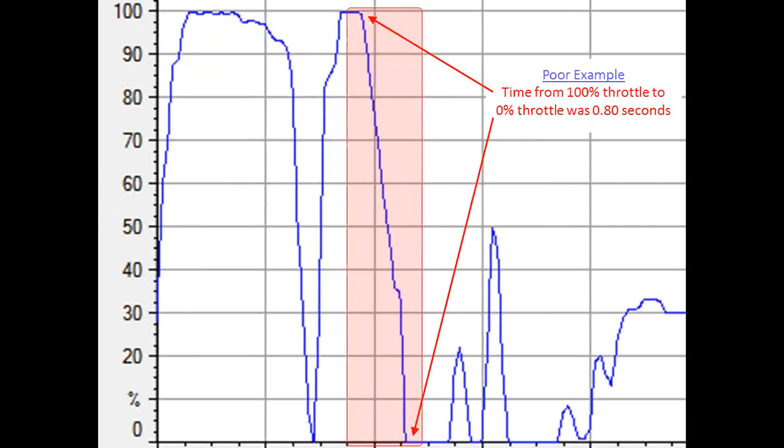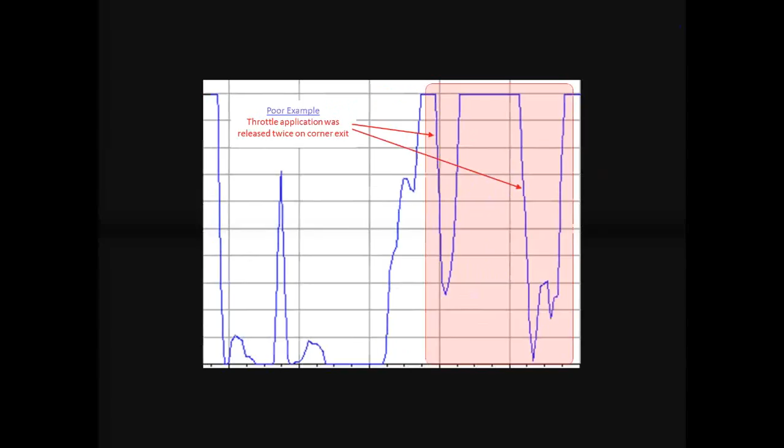It's just a little slow to react, like this driver is going to be. It is, right? And while you're pulling it up, Randy, I know you've got a couple questions that have recently popped up, if you can maybe handle those. Oh, sorry, that's okay. I'm not seeing them, David, at the moment. I'll have to fix this.

So here is a bit of the bigger picture zoomed in that Randy was talking about, and we can see that the driver is coming along and trying to get back after the throttle, but it's a steady climb. This is an MX-5 Cup car, so it has a little bit of power, but not a ton, so you can get away with a little bit more of a steep curve here, and then a little bit of throttle off on the way out in this particular case. So there was a problem on the exit where the driver got after the throttle, and then partway up on the exit, probably ran out of track. Maybe an understeer or an oversteer. We could look at some other channels to understand why better, but we do know right off the bat that the driver went to full throttle and then had to get out of the throttle.

And those are those big, pointy things sending down. So we had to go from 100% down to 30% to get the car to do what it wanted to do, then back to the floor, and then came up here, and then this area had to get back out of the throttle again. So throttle on exit, we'd like to be able to get after the throttle and get it up to full throttle and not have to have those releases in the middle of the corner.

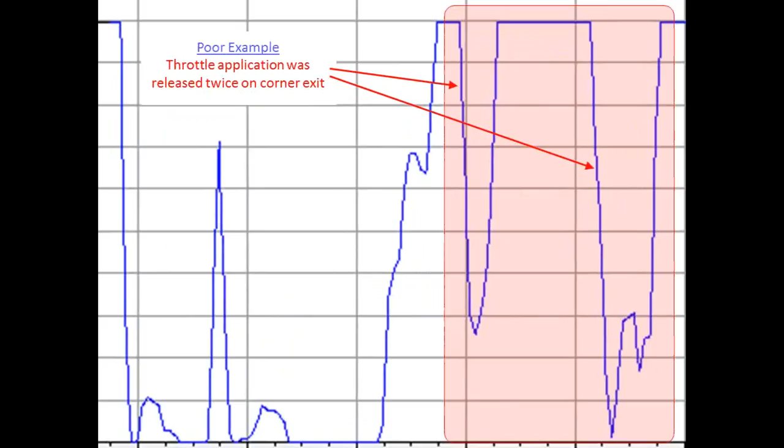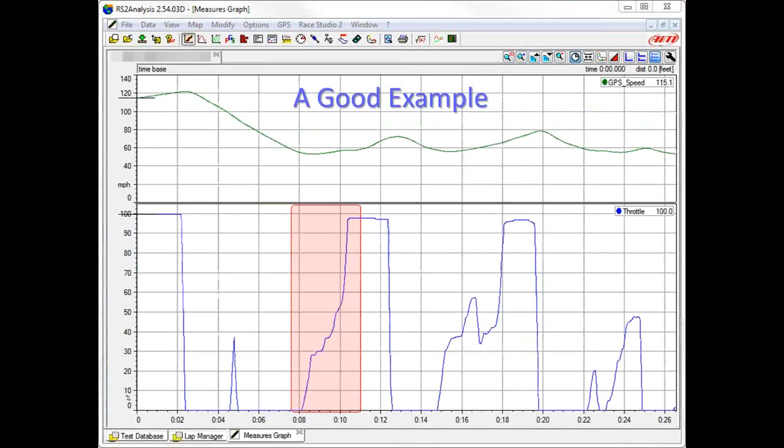Let's look at what maybe a better example would be. We're zoomed out a little bit here. We're going to jump in a little deeper and take a look at this one. You can see that the throttle has started to build from the lower end, down at the bottom side, and then squeezed up, and the driver is taking what the car will give.

And like Randy said, as you're feeding your hands back to center, your foot is almost like on that same string, and you're actually feeding more throttle as you release the steering. You can see the driver went after some, hesitated a little bit when they maybe felt the car doing some things, and then was able to squeeze on up to full throttle for the next straightaway.

Steady application. One of the things this tells me about this driver, that hesitation bit there, is he's got his eyes in the right place. He's looking well ahead, and that gives you the information, and you start adding that throttle and the tires. You're trying to keep it right on the edge, right on the limit.

And so you go a little over the limit, and you feel the car, and you see the car moving a little bit wide. You got to have your eyes in the right place to be able to identify that. If you're looking ahead, add that throttle, feel the car lose a little bit of grip. It's okay, that's all we can take right here. It hooks up a little more, and you continue adding some more.

You see, this driver was a little more careful after this mid-acceleration correction, too, but he never backed off. It was more and more and more, all the way to full. A good trace, and it shows a driver that's looking ahead and really looking for the limit.

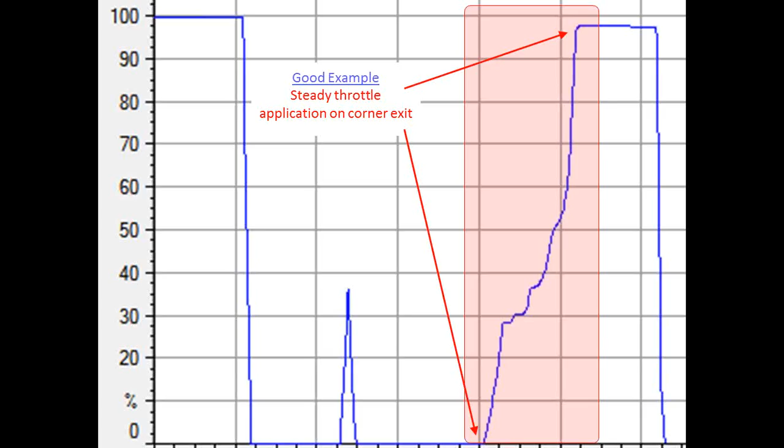And you crash less. Yeah, and that's a good thing.

Let's talk about shifting speed by looking at the throttle position. Let's take a look at what that trace looks like.

And I'm seeing some of the questions. I haven't had a chance to, I'm not the world's fastest typer, but there is some information we are going to talk about on solos and GPS-based systems where you don't have throttle position. So some of you that are asking that question, we will get to some other look and feel of some other things. Plus, my final thing that we're going to talk about today is some math channels.

And I'm going to make that available to anybody that writes me an email and asks for it. I have some math channels that are based strictly around what in our AIM world, the Solo device, which is a GPS-based data logger, that we can do some coasting and braking and throttle on and some things without that actual sensor. It's not as good, obviously, but it's pretty darn successful. So we'll take a look at those a little bit later.

Shifting. When you're shifting, you can actually take a look at that throttle position sensor, and we can take a look at a couple of, again, a bad example, then a good example of what a slow shift versus a high speed, a faster shift, and see what it looks like in the data.

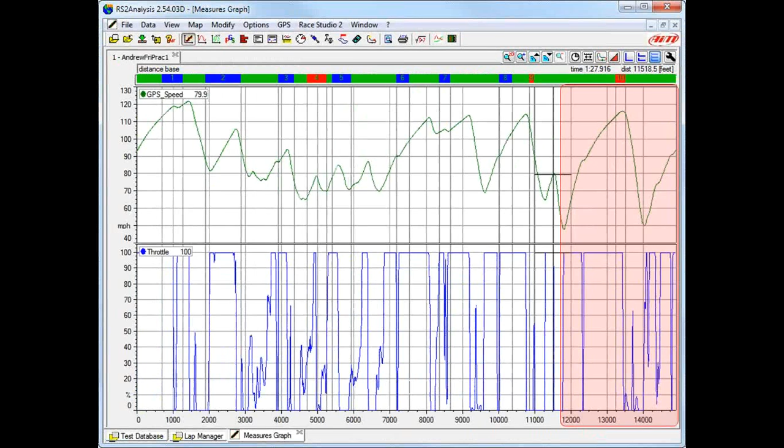So let's zoom in a little bit on this one right here. You can see here that the throttle position in the lower half, the driver's coming along, and we can actually just use a measure tool, and we can click on from when it goes from 100% throttle down to 0 and back up to 100%, and you can make the assumption, even without a gear position sensor, that's how long it took to shift.

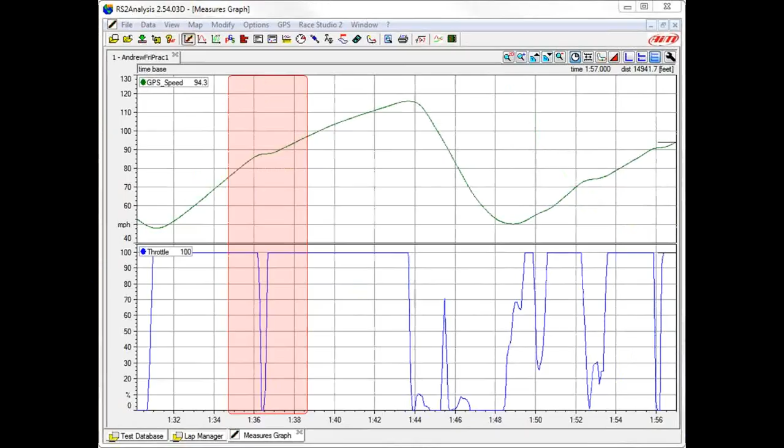So I'm going to zoom in just a little bit more. And let's take a look at this guy where these arrows are pointing. So right across here, the throttle position's coming along, it dips down and comes back up. And this particular shift here was 0.55 seconds, a little over half a second.

And when you start to see that, and then you take your eyes up and you look at the result of the speed trace up above, you can see where the speed trace was climbing nicely, and then with that fairly slow shift, it basically goes horizontal for a while and then starts back up again. You lose that, and you not only lose that for that moment of the shift, but of course you're that 2 miles or 3 miles an hour slower than the guy that had a better shift all the way down the rest of the straightaway.

What do you think about that, Randy? Well, fast shifting, it can be huge. It can be a free time thing, as long as your transmission can take it. You are limited, and you have to listen to your transmission, right?

If you have to force it, you're going to hurt the car long term. So it has to be as quick as you can do it without hurting anything. And every car has a different limit on that, and they're getting better and better all the time. It's getting to the point where we don't have to do this anymore.

It's automatic in the paddle shift cars. Your engineer might adjust the shift time or the throttle drop time for you. That's another way to mechanically, or from an engineering standpoint, change your shift speeds.

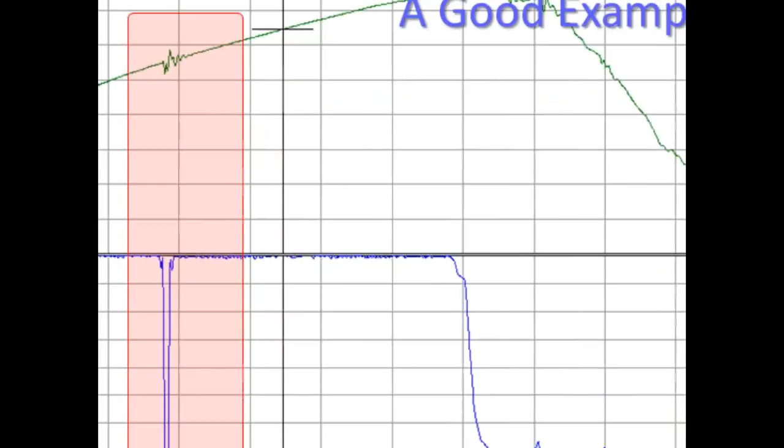So let's look a little bit deeper here. This is a Spec Miata, and if we zoom in just a bit more, we can see here... oops, wrong way, wrong buttons, let me jump one more ahead. So this is the throttle position trace down here at the bottom, and this upshift was 0.18 seconds. On the speed trace up here above, this is on the rear drive line. This is during the 2006 runoffs, and you can see the little wiggle in the speed sensor data was when the drive line just shook from the shift. So we can pick up the shift points from the speed trace as well as the throttle position.

My son quickly told me, in 2005 -- quick little story here -- I was always preaching to take it easy on the transmission, don't beat on it too hard, there's no reason for it. And he would go out and run, come back in and say, no, if I shift a little bit harder, I'm pulling on these guys if I abuse it just a touch. So we started looking at data and looking at these shifts. I'd tell him to run 3 or 4 laps of normal shifting, then some speed shifting stuff, as long as he wasn't missing shifts.

The data quickly showed that in a low horsepower car like a Spec Miata, that quicker shift really did help. Spec Miatas have gone up in price a little bit, but back then I was paying, I think, $850 or so for a transmission, and I had to replace it halfway through the year. So a tenth or so of lap time, over the course of a lap, ended up being 3 or 4 tenths of speed for $800 halfway through the year. That is cheap speed. So it was like, beat on that transmission all you want, man, if it's going to make it go that well -- as long as you're not missing shifts. That was the key to me.

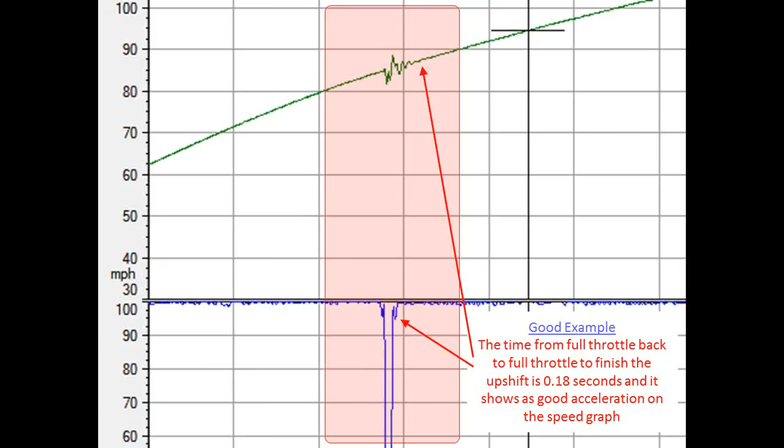So it's a Spec Miata, and it's at 85 miles an hour. I would suggest that it's probably not wheel spin. Right? So let's jump down one more. Let's see what the next topic is.

Brakes, and this is an area I'll start off real quick. I give these seminars from January through May, virtually every weekend somewhere across the country, to data users, and the one area that is the least watched in data, and the biggest area of gain for amateur racers and track day guys, is the brakes. The application of the brake and the release of the brake are two areas that always grab a lot of information from data sessions. So what's your idea on the brakes?

And then we'll jump into looking at some brake pressure release. One of the most critical steps between being just a regular driver at the races and becoming one of the fast guys is, at the end of the brake zone, being able to come off the brake slowly even though you're carrying speed, and at the same time carry more speed into the corner. It's really difficult for drivers to make that breakthrough to the next level, because they feel like they want to enter the corner faster. Well, if you're going too fast, what do you want to do? Brake more.

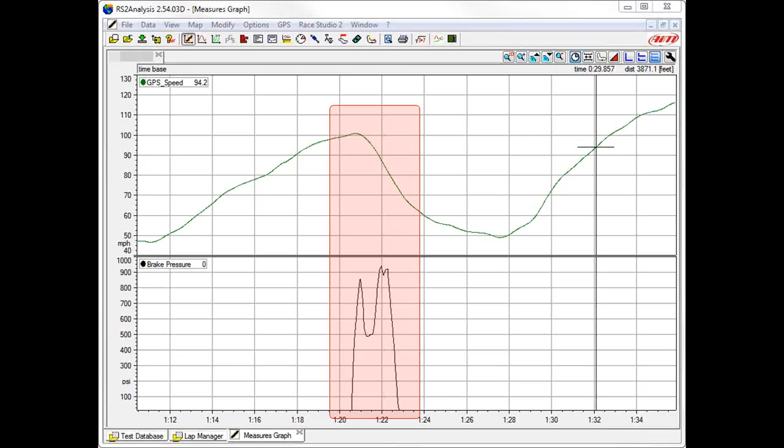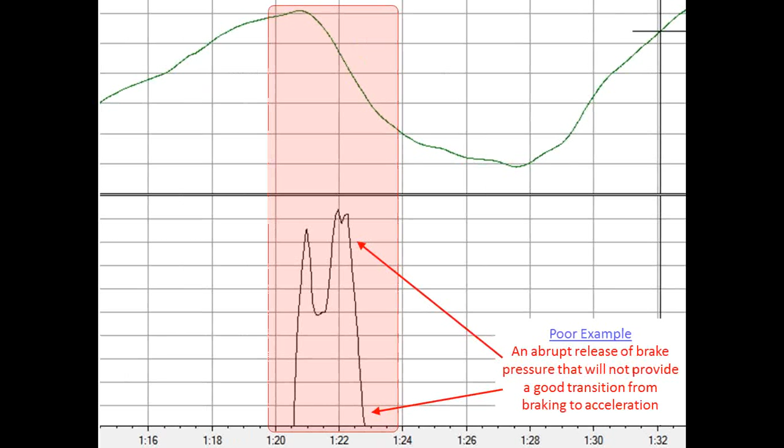Absolutely. So let's take a look at what maybe, zoomed in a little bit more, that abrupt release of the brake pressure will not provide a good transition from braking to acceleration. It's just not possible. The driver has a lot to do with how good that car is handling. Engineers can only work so hard and adjust so many things if the driver is really irritating the car.

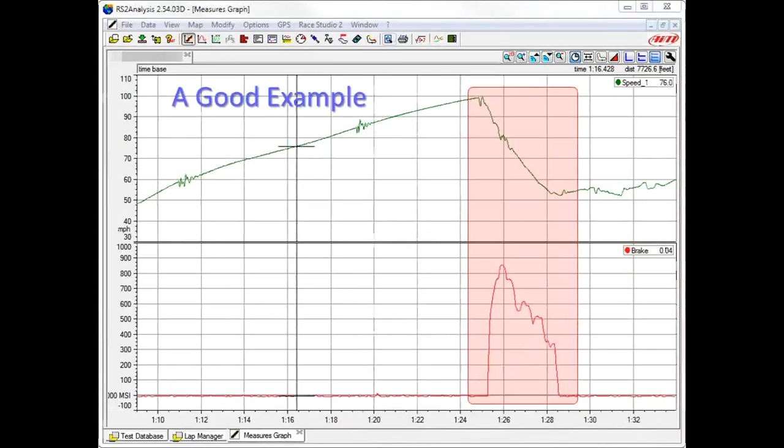So let's look at what maybe a little bit better example might look like. This is back to, I think, Spec Miata. Let's zoom in a little bit here. Yes, there is some drop off here, and the braking is moving around. This is that 2006 runoff, so it was a half wet, half dry track. There are times when the driver is doing some different things with his foot, trying to make some things happen.

But you can see here, basically the peak of the brake was at the middle of the braking, and then he starts to release, and when he's actually ready to go to the throttle, he's got the car rotated and the trail braking is happening, which you can kind of see from the shape of the speed trace coming down, even without lateral G's. And then when the time came, he drops the brake and then squeezes onto the throttle. So this is a little bit better example than the other one, where it was just an absolute straight drop off.

Now, Roger, is this a wheel speed sensor? The upper one is a rear wheel speed sensor in this case, and it's a brake pressure sensor on the bottom half. Good point, I should be naming those every time, and I haven't done that. Yeah, it's a rear. Most times we see lockup in the front, especially on a Spec Miata, but most non-ABS cars will tend to lock the front because it's much more drivable.

And you could look for those little dips in the speed trace. If it doesn't go to zero or close to zero, you're probably not hurting the tire. But that best grip comes with very little slide, just like in a corner, and it doesn't heat the tire up as fast, et cetera, also.

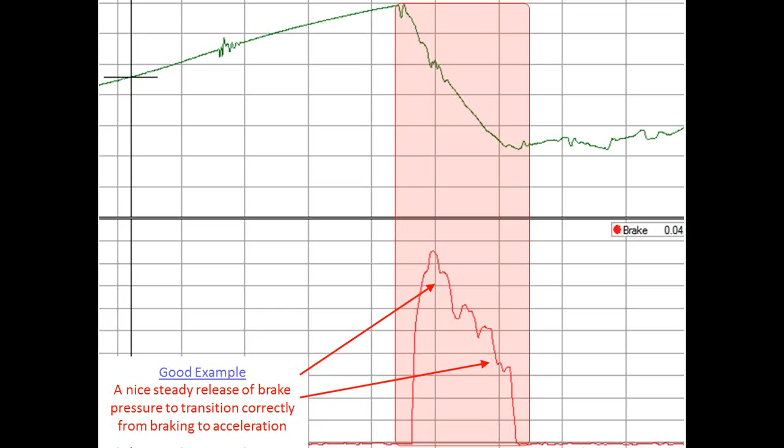Probably, you also might see a little bit of this from a downforce car. When the speeds come down, the brake pressure has to come down because you don't have that downforce anymore, adding grip. Absolutely, they're tricky to stop. Yeah, they're tricky, I'll bet.

The next one is one that you mentioned at the Road Atlanta webinar, and it's something that I try to look for as well, and it's consistency of braking during the downshifts. Yeah, that's a classic. It's an area that a lot of people can improve on, almost everybody.

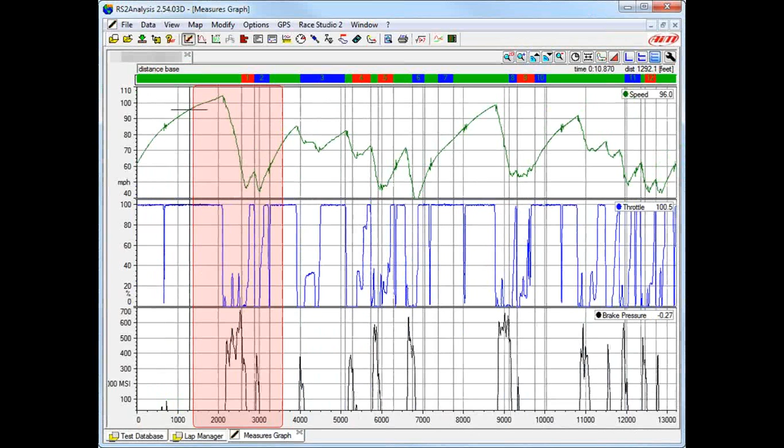So let's take a look at maybe what a bad example of that might look like. So here, the first thing we're going to look at is, let's zoom in just a touch more and take a look. In this case, I left the speed in the upper half, the throttle position, and the brake pressure at the bottom. So you can take a look at this guy here, the brake pressure here at the bottom.

You can see he jumped out of the throttle, it came down, and he rolls onto the brakes. Every time you see the blip of the throttle, you can see the movement of the brake pressure. That's a skill that it's very rare somebody has right off the bat, but it's something you can work on to make very good. You can see the inaccuracy of the driver's foot on the brakes, and this is again upsetting the apple cart. It's a rocking horse, loading the front end and releasing, loading and releasing, and it's just going to hurt the tires and hurt speed. There's nothing good about this.

We've got that little throttle blip there too, right at the beginning. I wonder if maybe this driver bumped the throttle when first going to the brake. Yeah, could well have been. Very odd. Sometimes you'll see the brake pressure touched back here, where a driver is just getting a little confidence bump, knocking the pads back or whatever. But in this particular case, I think he touched the throttle with his foot as he was going down to the brake, and again, not a good thing to do. Cars really don't like when you try to do both, because you're pushing the rear tires against the fronts, and you're already overloading the fronts. If you touch both pedals, it really irritates the car, and understeer happens almost immediately.

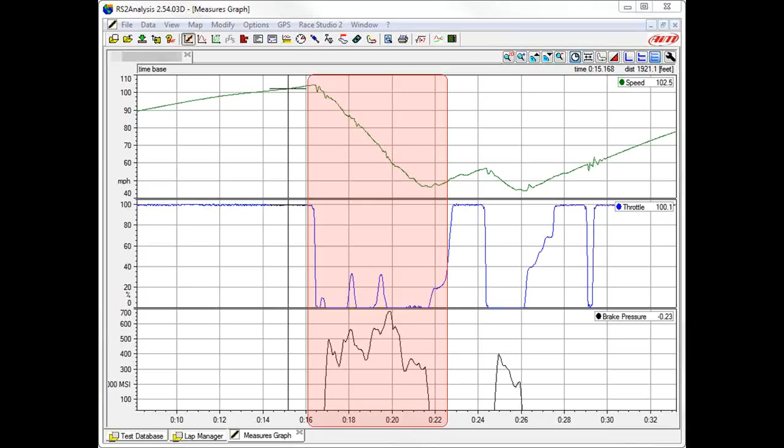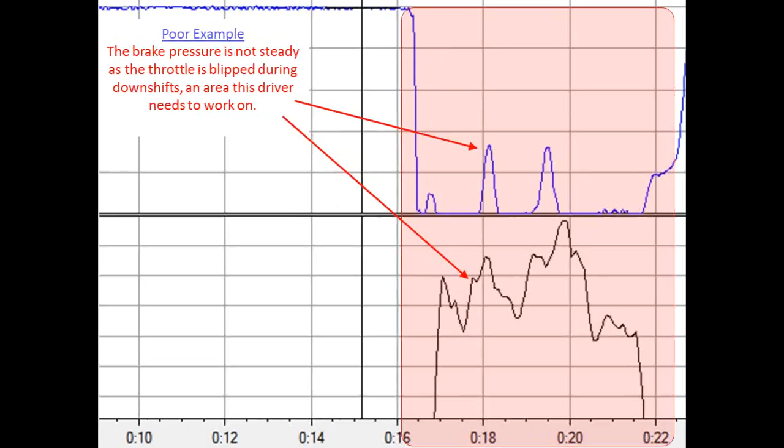Looking smooth, and this becomes easier with modern transmissions. It's surprising how old patterns are starting to seem more and more antique, because with paddle shifters, the most modern ones are doing the blips for you. But with sequential transmissions, you can left-foot brake, and then your blip and your braking are much easier to separate, but it's still an important issue that you can see in data traces. Yeah, absolutely.

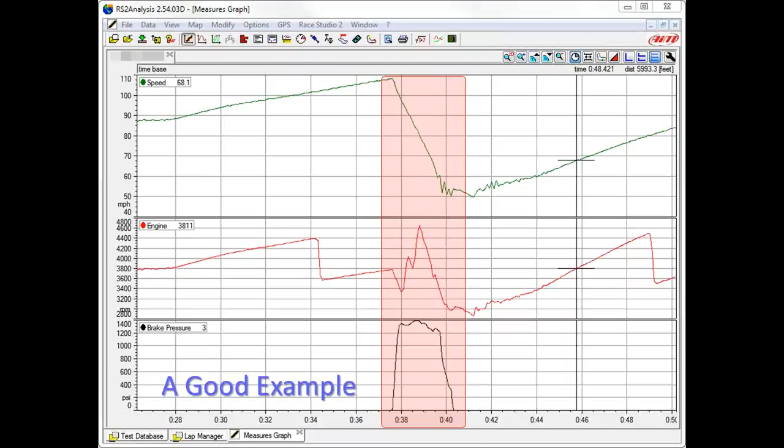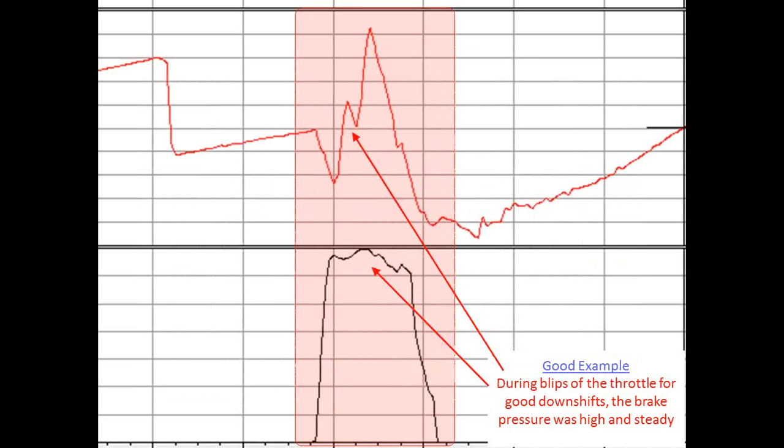Let's jump to the next one. There's a little zoomed in area of it there for you. During those blips, there's a little bit of change in the brake, but not a ton. And you can see a big change in the revs. Absolutely, yeah, so there's a lot of throttle coming in there.

Here we're going to show you a little bit about steering. We've gone with our feet first, with throttle and braking. Now we're going to look at some steering information, especially focused on the exit oversteer. The steering trace is a great way for the engineer to understand what the driver's saying, because many drivers don't see what the car's doing very well, frankly. If a driver doesn't, you can look at that steering trace, and it tells you, especially about oversteer. It's so easy looking at the trace to pick out a driver correcting.

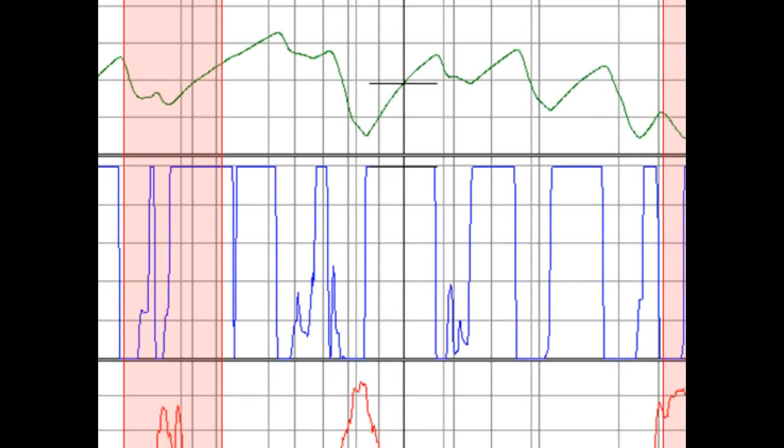I was picking on a guy not long ago. He was telling me how well his car was handling and how balanced it was. I was looking at his steering trace, the big picture, all at once. When I'm looking at oversteer, that's countersteer, so the trace goes the opposite way - we'll be looking at that in a second here with Roger. I looked at the whole lap, and I'm like, well wait a minute, you had a big correction here, and a big correction here, and a big one here. Your car's not terribly well balanced. That's everywhere around the track. The data makes it hard to lie in some situations.

Exactly, and you talk about that. Here's a full lap I just brought up, and you can see just by looking at the steering trace, which is the lowest one here, the third one in the window, you can see the lefts and rights of the steering wheel. Where I've got two of them highlighted here, there are two large corrections.

There's one there, and there's one over here where there's a big fallout. It doesn't take, I'm not the smartest guy in the world, none of these engineers do these things, we can pick up this stuff pretty easily, and you can see it pretty quickly.

So now we know it did it. The next question is always why? Was the driver chasing the car, or was the car creating the problem, or was the driver creating the problem? Those are the things we've got to continue to dig into and then solve. So let's zoom in on one of these and take a closer look and see what we see.

So here, exit, I got two examples of exit oversteer here. There's other ways, the next couple slides we're going to show you a different way of looking at this, but let's just look at the steering position, which is the red one at the bottom. You can see I left the throttle position up here in the upper half. So the driver turns in, and he's starting to feed in the steering wheel as it goes up.

You can see that as soon as the driver starts to throttle up, the more opposite lock goes onto the steering wheel, to a point down here where, while I show that the car has exit oversteer, clearly it does, but I also mentioned that it was manageable.

And I say that it's manageable, and the reason I say that is drivers are paid to get the most out of their car, and their job is to get after the throttle as soon as they can. There's always going to be some of this, you're floating the car on the head of that pin and keeping it right there underneath you. So there'll always be some movement here of keeping that under you. The driver gave it some opposite steering, but he never had to get out of the throttle. As you can see, once it's got to full throttle, he's able to keep the throttle after it.

Then it came back to being a fairly neutral car as the driver got towards the exit and was able to free up and open up the steering even more, and then the normal steering happens. So you can pick up on the exit oversteer quickly, and you can see exactly why it happened as the driver was throwing throttle at it.

Okay, this is digging deep. I love this. This is a way that an engineer can look at data and decide how the car is handling.

One downside of this, I'm warning you engineer types, is that your driver may be aware of this oversteer that shows up on throttle application and may be deliberately being very gentle with throttle application.

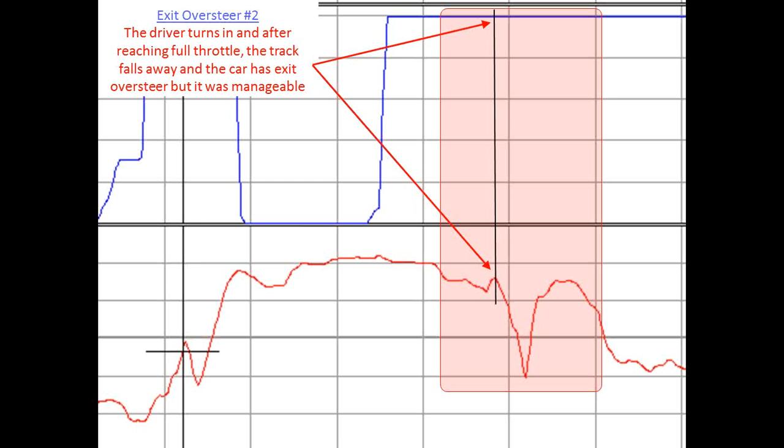That's what happened here. 10B at Road Atlanta? Yeah, absolutely - yes, it absolutely can be. So, turn 10B at Road Atlanta. Yep, that's that way. Yep, exactly.

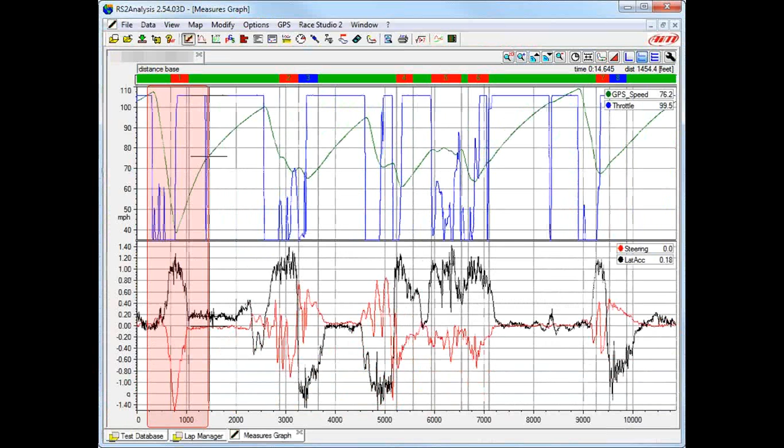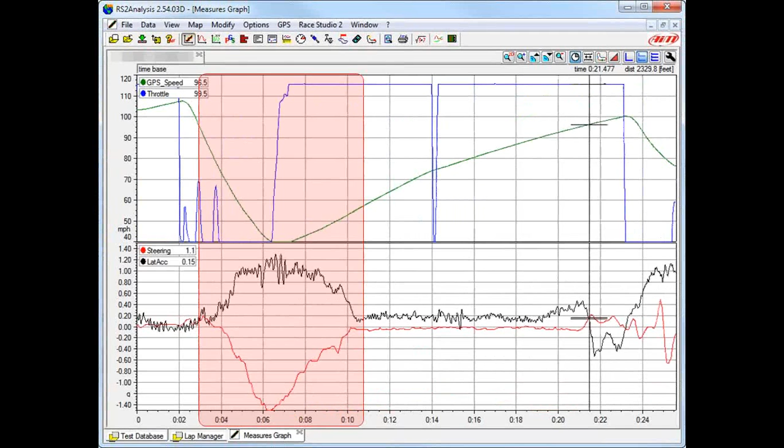Let's talk a little bit about understeer and what that looks like. You can find it just by looking at the steering trace, but I wanted to introduce lateral G's along with steering in this particular example. It's going to look a lot like the other one did, but I threw one more channel in there. This is the way that I look at data when I have steering and lateral G's - this is kind of my home base for looking for understeer. Other people do it different ways, and we can have some math channels that do certain things, but let's zoom in on this turn 1 and take a look, to give you an idea of what I look for when I'm looking for understeer, or when this jumps out at me as understeer. I'm going to zoom in one more little bit - so here, this happens to be the old Cleveland temporary circuit.

Back in 2007, we ran MX5 Cups there. So this is an absolutely flat track. Down at the bottom, the red line is steering. The black trace above it is lateral G's. And then we've got speed trace and throttle position up in the upper half.

What I tend to do is watch the lateral G's, the buildup of the car, and when it stops, when the lateral G's stop getting higher, stop building, and the driver continues to turn the steering wheel, by definition, that's understeer, right?

The driver continued to turn the steering wheel, and the car no longer generated more lateral G's. So the driver was wanting more. It's kind of interesting that sometimes it goes away by itself just by scrubbing off speed, or sometimes the track finally comes to you and you get a little bit of banking.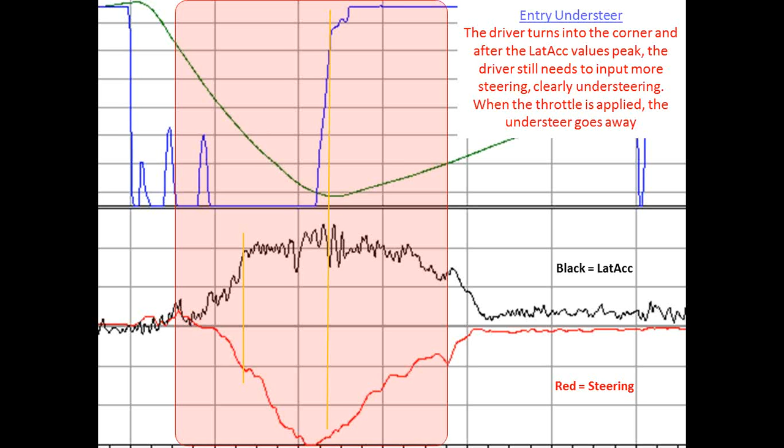There's not much more we can do to help them, other than listen on the radio and be beat up a little bit from the way the car was set up, right? Blame the team. There you go. There you go. Blame your dad. Yeah, right?

Yeah, exactly. We're right at our hour limit, and I have one more little section I want to talk about. It's not going to be a bunch of deep information, but I want to make this available to everybody. I'm going to give you my email address on the last slide, but I'm going to show you a couple of pretty cool math channels that a lot of people really like that we work with, and a couple things we can measure very quickly by doing some simple math channels is coasting and maybe some braking, the two examples I'm going to show you. There's a bunch of other things.

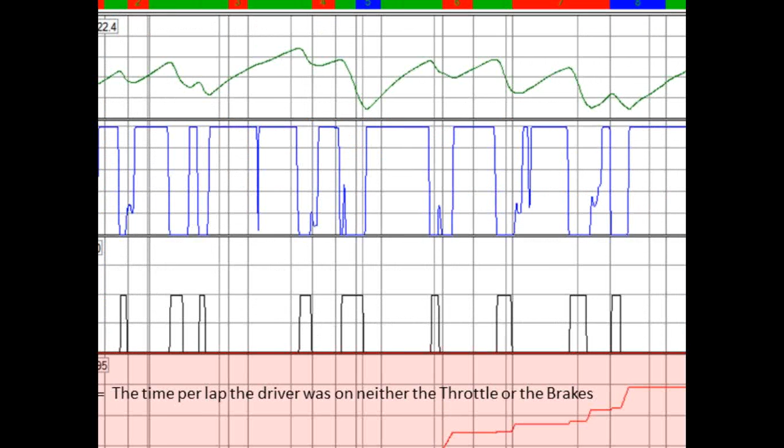Let's take a look at something real quick. I'm not going to go into the math channel in depth, but in this particular case, I'm showing speed across the top, throttle position is the blue one, and I've just got a brake switch. You could have brake pressures, different ways of doing it, and we can actually calculate from the data that anytime you're less than, let's say, 50% on the throttle, might be 25%, and the brakes are not on, by definition you're coasting, right?

If you got both feet off the pedals, we can actually add that time up with a quick little math channel. In this particular case, I've got the cursor over here at this edge, and it's showing me that for the course of this lap, the driver had actually coasted for 7.95 seconds. Those are things that, especially with drivers getting the hang of things and wanting to work on their foot speed, we can look at and quantify for every lap with a simple math channel, and then look at your improvement.

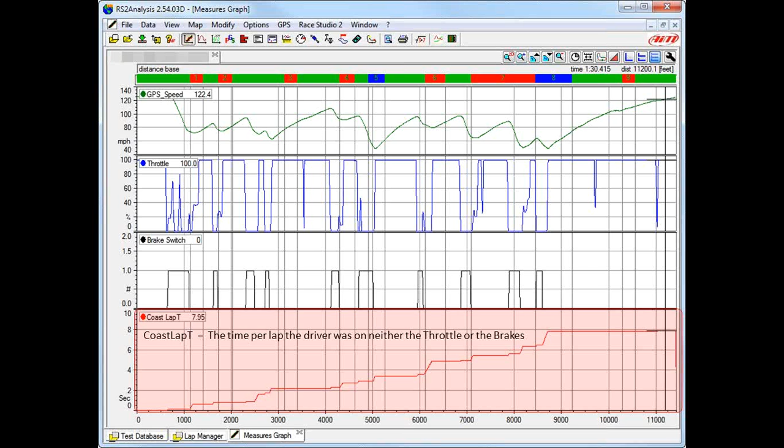I'm always the first one to tell you, though, there's times when coasting is the right thing to do. Especially for front drivers, we're not trying to get to zero, but we also don't want to be at 25 seconds, right? So there's a balance here.

Let me jump ahead one slide and go to what we call a channel report in the Race Studio software. Across the top here I've created four of them, and there's only two laps. This happened to be a qualifying lap. So over the course of 11,300 feet of per lap distance, on the coasting time, on these two laps, one lap was 9.60 seconds, one was 7.95. In feet, we can actually do the math and see the feet you actually coasted as well, not just time—1,036 feet for one lap, 840 feet for the other.

And then just another math channel that I built real quickly: how long were you on the brakes? We can look at this and say if anything above 200 psi or when the brake switch is on, we can add that time up. On these particular two laps, one lap was 15.2 seconds on brakes and 15.9 seconds on the other. The far right column is the number of feet the driver was actually on the brakes. So little things like this—if you had a 20-lap session, you could make these math channels really quickly and add up these things and really watch it.

It's kind of interesting that the AIM software bolds the fastest lap of these two qualifying laps. The fastest lap is the upper one, a 131.5 versus a 131.7, and the driver actually coasted almost two seconds more and about 200 and some more feet on the faster of the two laps. It's not always a correlation—sometimes you do want to coast, all that lateral G, you really need to keep it. But it's absolutely something that can do you some really good.

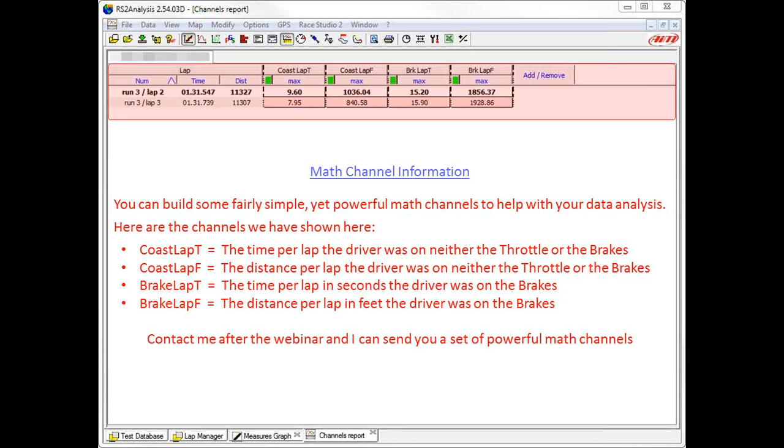Let's talk about a couple other things that are available to the folks watching. One of my main jobs during the time that I'm not on the road is to build training videos, short quick things about the basics. One of the most popular ones lately is 'I have downloaded my data, now what?' It's kind of based around the Solo user. I've also got one just about friction circles and how to build them in our software, and on and on. There's about 25 videos out there on a YouTube site, and the address is on there if you want to take a look.

One other thing I wanted to talk about, I pulled out my trending slide since I wasn't sure I'd have enough time. Trends are really important. We did a lot of things kind of wrong here today by looking at just one single spot of a single trace. You always want to look at trends.

The other thing I want to do is leave my contact information. If you drop me an email at roger@aimsports.com this evening or tomorrow, anybody listening who wants those math channels, I will turn those right around. I've got documentation written up on how to bring them in, how to use them, and how to modify them for your math channel and channel names. So send me that, and we'll talk about it.